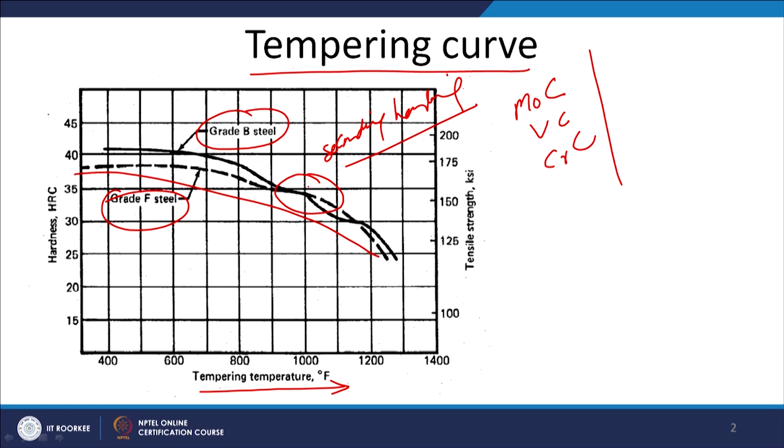Since these elements are already present in both these steels, there is one more aspect: the drop in hardness of the F grade steel is faster than the B grade steels, while the secondary hardening behavior is the same in both categories of steels.

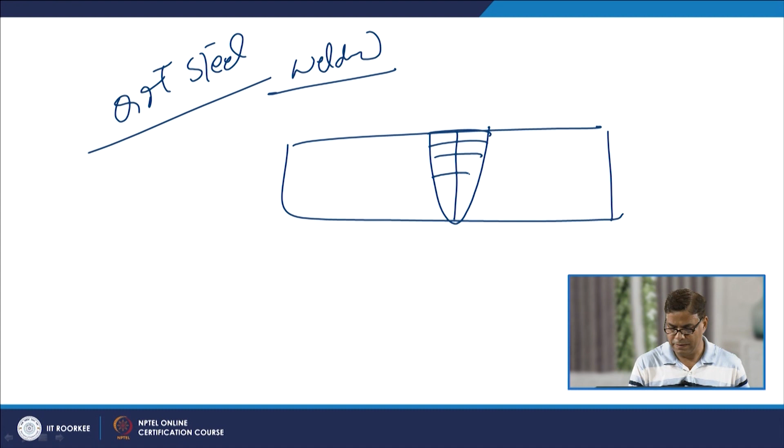Now, we have seen that when Q&T steels are welded, the weld metal as well as the heat affected zone will be experiencing different weld thermal cycles in different zones, and the kind of cooling rate experienced in these cases is found sufficient for the formation of martensite as well as upper bainite, sometimes lower bainite, and ferrite.

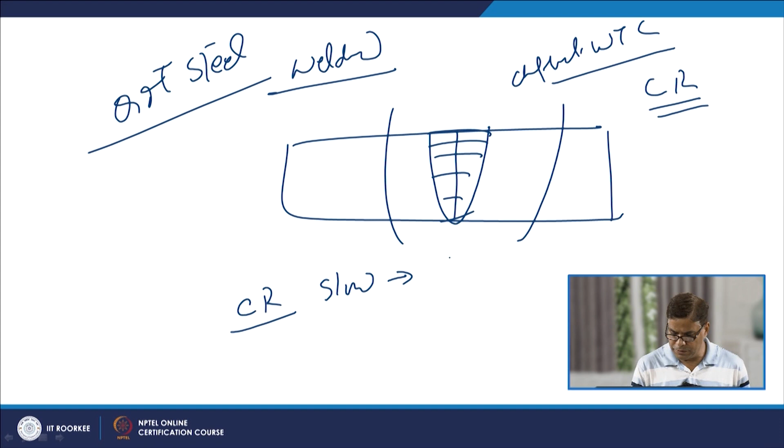But what we need to consider is, if the cooling rate is unfavorable, that is very slow, then it will lead to the formation of ferrite and upper bainite only, which lowers the mechanical properties significantly. So there is a deterioration in mechanical properties in terms of notch toughness and yield strength.

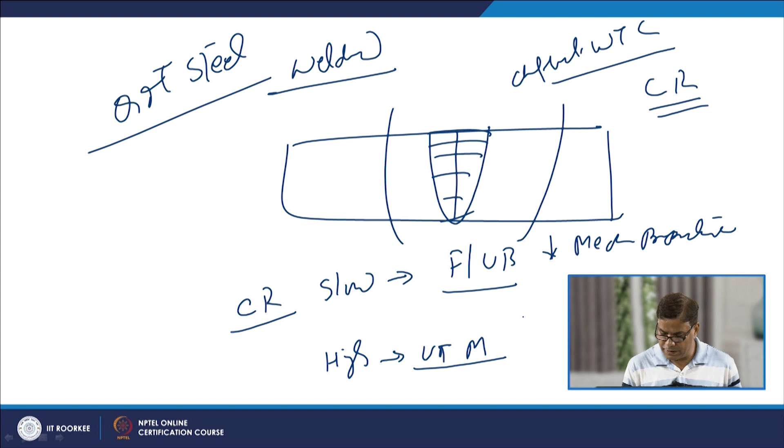When the cooling rate is extremely high, it will lead to the formation of untempered martensite. The development of residual stresses in combination with the formation of untempered martensite will increase the cracking tendency, which defeats the purpose, as the weld joint is then being made with a defect.

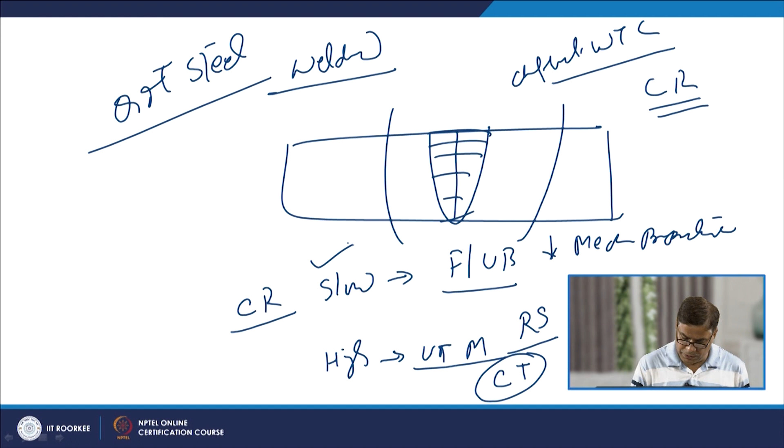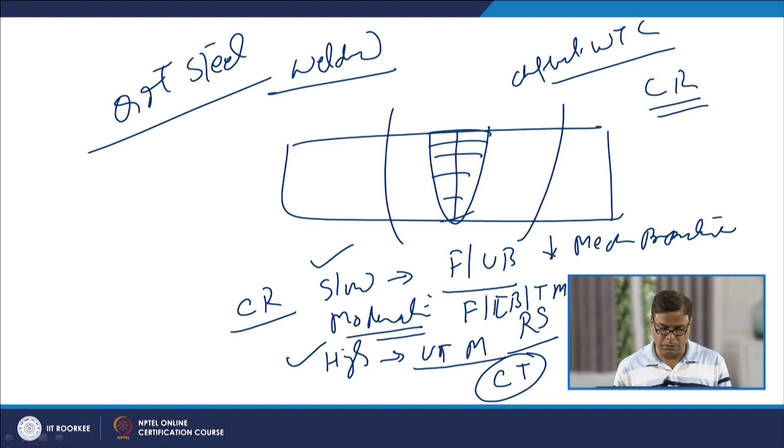So neither too high nor too low a cooling rate is needed during welding, and that is why moderate cooling rates need to be used, so that we get ferrite, bainite, lower bainite, and maybe auto-tempered martensite, giving a reasonable combination of yield strength and toughness, while unnecessary residual stresses are not developed, reducing cracking tendency and embrittlement tendency.

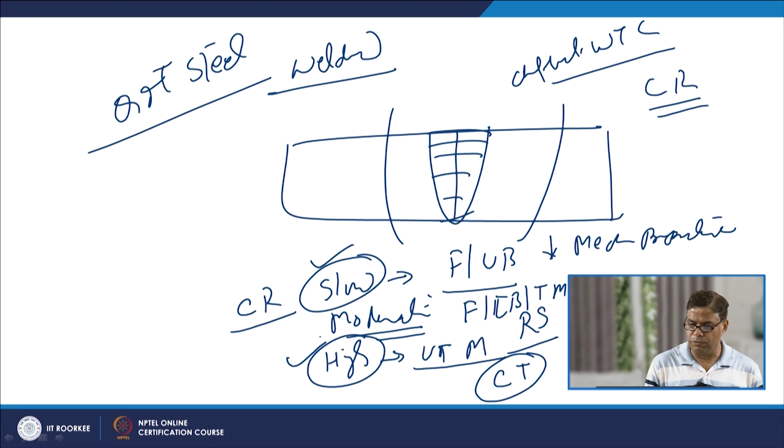So what can we do for this purpose? We have to avoid excessively high preheat. Preheating is needed, so an optimum preheat is to be used. If the preheating temperature and interpass temperature during welding of Q&T steels is too low, this will lead to a high cooling rate, which may increase the tendency for cracking due to the formation of untempered martensite.

On the other hand, if the preheating temperature is very high, this will lead to a very low cooling rate, and a low cooling rate again will lead to the formation of ferrite and upper bainite, which deteriorate the mechanical properties in terms of reduced notch toughness and yield strength.

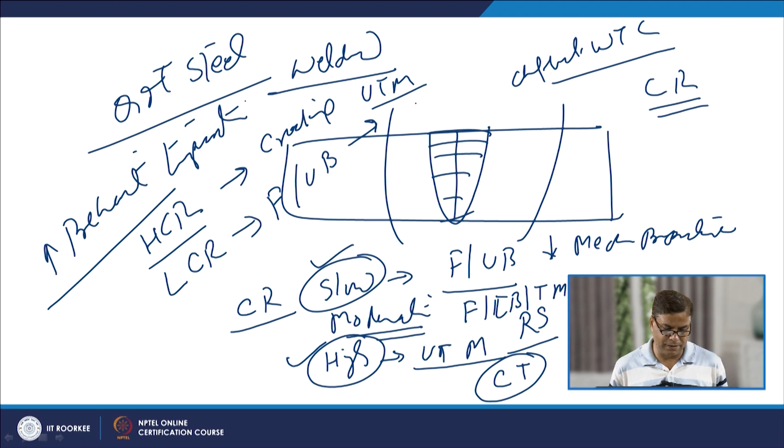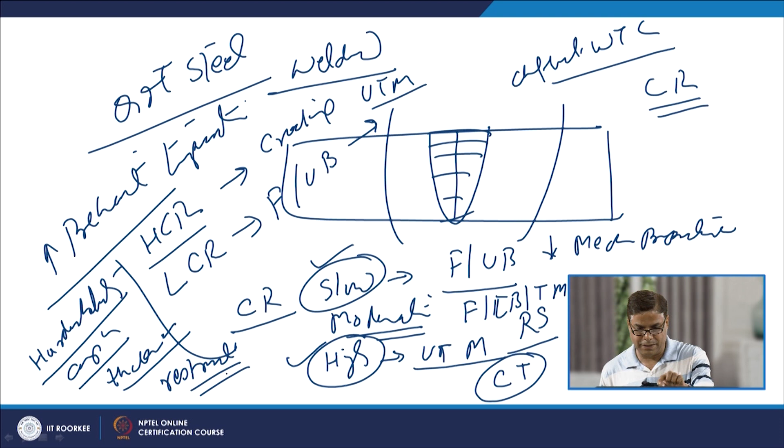So an optimum preheat temperature is to be used, carefully controlled in light of the hardenability as dictated by the composition of the steel, the thickness of the plate being welded, and the kind of restraint conditions being used, so that unnecessary cracking tendency can be reduced and the required set of properties in the weld joint can be realized.

Therefore, different values of preheat are used. Too high a preheat temperature, say 500 Fahrenheit, will lower the cooling rate, leading to the formation of ferrite, upper bainite, and maybe high carbon martensite. On the other hand, say 200 Fahrenheit will lead to a reasonable cooling rate and a good combination of ferrite, lower bainite, and maybe tempered martensite, giving much better toughness compared to when a very high preheat temperature is used.

So if we see this kind of comparison, the way by which the preheat temperature affects the toughness in terms of the energy absorbed.

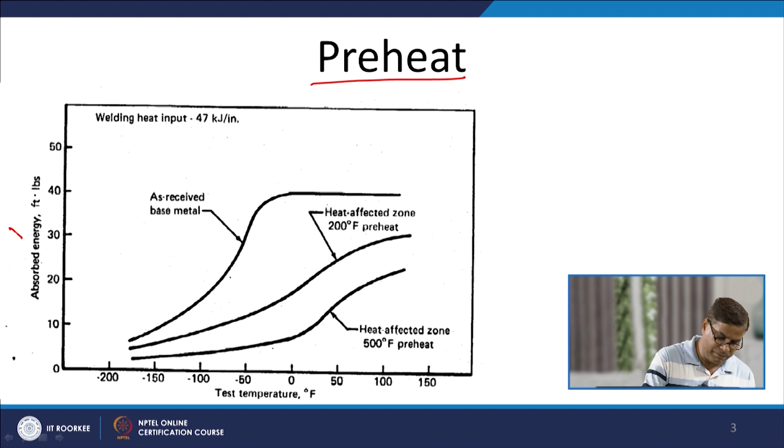This is basically indicating the notch toughness of the Q&T steel weld joints, the base metal toughness behavior as a function of the test temperature. This is the variation in toughness as a function of temperature.

If we take any temperature of the impact test, the base metal will be offering very high energy absorbed, high toughness, while the heat affected zone exposed to preheating of 200 Fahrenheit offers somewhat better impact resistance in terms of energy absorbed as compared to the case when a preheat of 500 Fahrenheit is used.

So what we can see here in all cases, there is a drop in the energy absorbed with the reduction in temperature, but this kind of drop is more severe when the preheat temperature is high, especially with regard to the impact resistance of the heat affected zone.

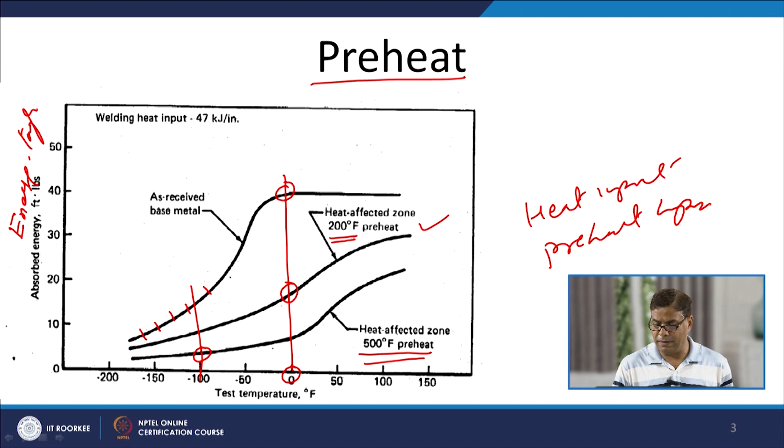So many times the heat input during the welding and the preheat temperatures are identified considering the toughness or notch toughness of the weld as well as the heat affected zone.

So the preheat temperature and the heat input are identified or established during the welding procedure specification, that means the heat input and the preheat temperatures are established in such a way that the weld joint in the heat affected zone and in the weld metal is having the minimum required toughness for a given application.

This can vary, it may be in terms of 30 units, or it may be 46 units or 64 units. So as per the application, the minimum required toughness can vary or change significantly. Accordingly, the heat input for a given welding process and the preheat temperatures need to be identified.

So higher preheat temperatures are not good, especially with regard to the impact resistance of the heat affected zone and the weld metal.

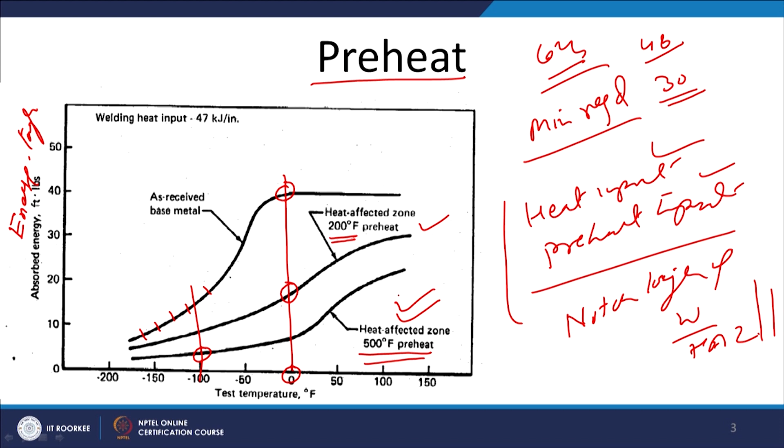Now we will see. Keeping in mind the thickness of the plate, which determines the rate at which heat is being extracted from the weld as well as the heat affected zone, so the thickness and the composition—different steels having different alloying concentrations—will be affecting the carbon equivalent.

So the conditions under which a particular kind of phase transformation takes place will also be changing, and therefore we find that the minimum preheat or interpass temperatures are found to vary significantly with the change of thickness of the plate which is to be welded.

The most common series of Q&T steel is A514 and A517. We can notice that with the increase in thickness of the plate to be welded, there is a continuous increase in the temperature which is to be used for the preheat.

And likewise for different steels there are different values of the minimum preheat temperature, which means these preheat temperatures need to be established in light of the application for a given thickness and a given type of steel, so that the preheat temperature and heat input combination offer us the required cooling rate, so that we have the desired set of microstructural features to obtain the required combination of mechanical properties in terms of yield strength and toughness or notch toughness.

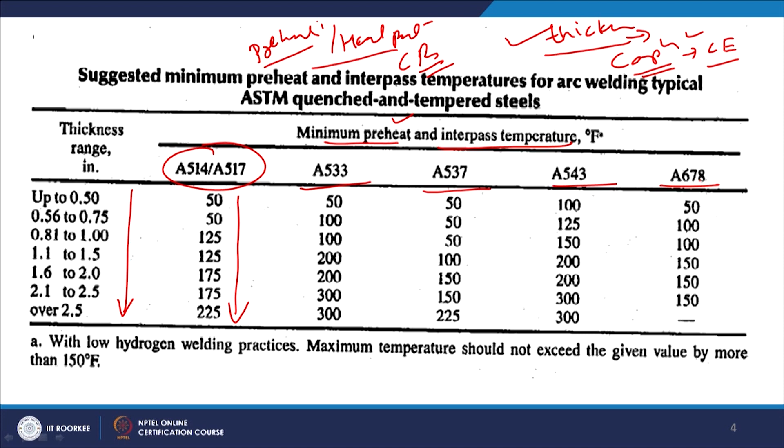So these are the preheat and interpass temperatures for the most commonly used Q&T steels, and in the next slide we have a few more preheat and interpass temperatures for HY80, HY100 and HY130 steels.

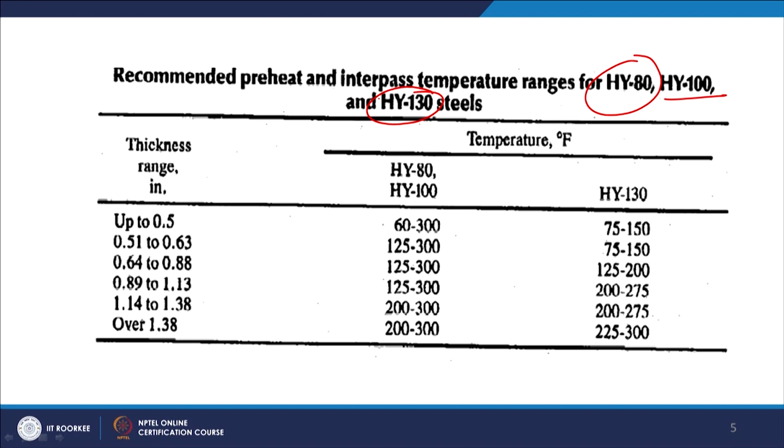And what we notice is that in this case also, with the increase in thickness of the plate, the required preheat temperature is also increased.

So almost similar preheat temperatures are there for HY80 and HY100, like for up to 0.5 inch it is 60 to 300 Fahrenheit, then 125 to 300.

So depending upon the thickness and the welding process, the kind of temperatures used have been mentioned here, and what it shows is that the minimum preheat and interpass temperatures will be increasing with the increase in thickness of the plate, while higher preheat and higher interpass temperatures are used for HY130.

It will be offering us much higher yield strength as compared to that of HY80 and HY100 type of steel. So a proper combination of the preheat and the heat input is needed.

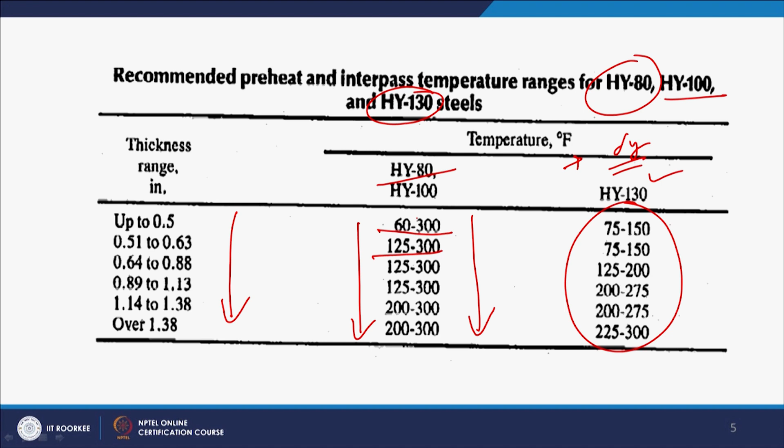Now we know that for welding or for fusion welding, heat is applied at the faying surfaces using a suitable heat source, which may be in the form of gas flame, arc, radiations like laser and electron beam, or it may be plasma. So a suitable heat source is used to apply the heat.

Since the energy density associated with each of the welding processes is different, the amount of heat to be supplied by these processes for bringing the faying surfaces of the plates to be welded will also be different.

Low energy density processes like gas welding require more heat to be supplied. So the fused zone size is more, heat affected zone size is more, and because of the high heat input we get lower cooling rates.

On the other hand, laser beam and electron beam welding processes offer very high energy density. So very less heat is required to bring the surfaces to the molten state, and a very limited heat affected zone is formed due to the less heat supply. We know cooling rate and heat input are inversely related, so lower heat input leads to higher cooling rate. Cooling rate and heat input are very closely related.

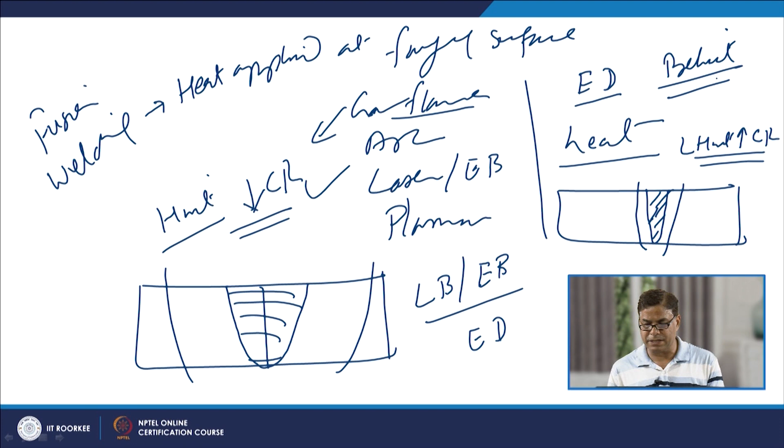Most common arc welding processes can be used for welding of Q&T steels, like SMAW, GMAW, GTAW, SAW, PAW. All these can be used for welding of steels having strengths from 50 to 100 KSI. But when the steel strength is greater than 100 KSI, we would like to use good quality welding processes that offer lesser heat input, so that the heat affected zone being formed is limited.

At the same time, the oxygen and nitrogen concentration in the weld is also less. Proper protection of shielding gases in case of GMAW, GTAW and plasma arc welding helps us develop good quality weld joints with less heat input, and the gases present in form of oxygen and nitrogen in the weld metal are also reduced.

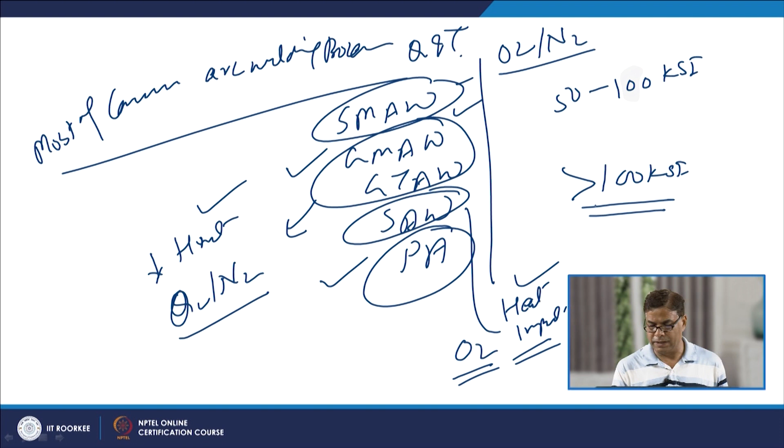Likewise, SAW also offers higher concentration of oxygen, and the heat input provided by SAW is also on the higher side. So it results in weld discontinuities due to oxygen present or flux inclusions, or wider heat affected zone due to higher heat input. So we prefer to weld high yield strength Q&T steels by GMAW, GTAW and the PAW processes.

We can use laser beam welding and electron beam welding for autogenous, meaning direct welding with no filler, up to 0.5 inch thickness of the Q&T steels. Since both these processes have very high energy density, they supply very less heat for realizing fusion of the surfaces to develop the joint.

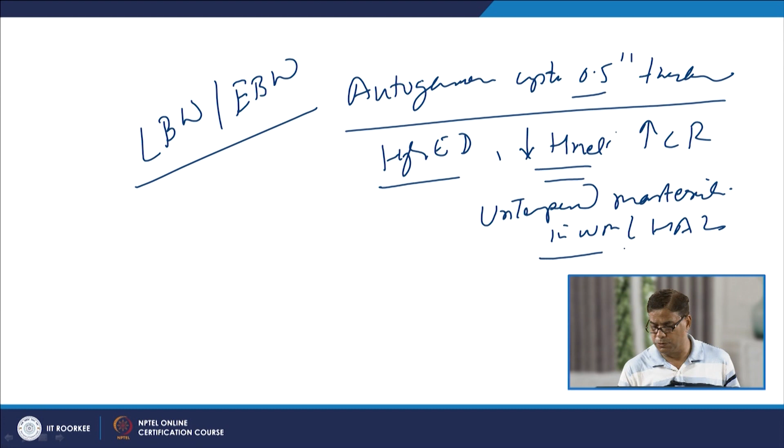Cooling rate is extremely high, and because of the high cooling rate, mostly with these processes we get untempered martensite both in the weld metal as well as heat affected zone. So we need to be careful about the embrittlement associated with the untempered martensite.

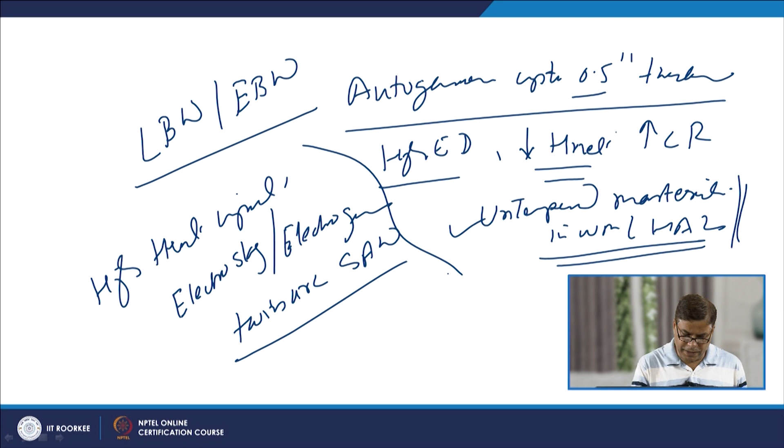But if we use very high heat input processes like electro slag and electro gas welding, or twin arc SAW process, then very high heat input will lead to a very wide heat affected zone, and unfavorable structure both in the weld and heat affected zone, which may be in form of ferrite, upper bainite, or very high carbon martensite.

And since the steel is the Q&T steel, over tempering of the heat affected zone is also caused by the welding processes which are of high heat input.

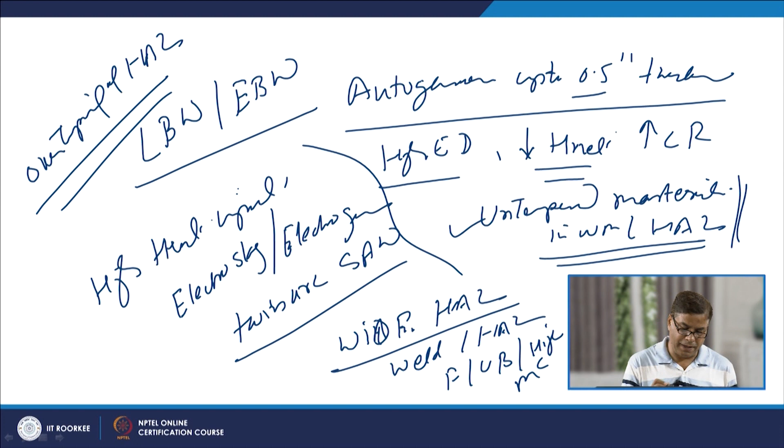So in order to overcome the issues related with weld joints made using high heat input processes, like wide heat affected zone, upper bainite, ferrite, and high carbon martensite, or even over tempering of the HAZ, it is required that the entire weld joint is given complete heat treatment again.

What does it involve? Austenitizing of the weldment, followed by quenching, then tempering, so that the properties in the base, in the weld, as well as heat affected zone can be homogenized and the properties can be restored.

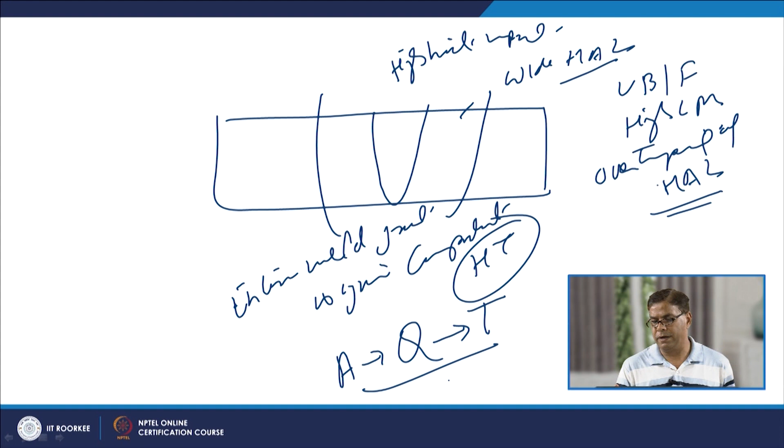So the adverse effects related with the high heat input associated with electro slag, electro gas, and submerged arc welding processes can be reduced. The complete heat treatment of such weld joints is needed, so that especially the notch toughness can be restored, apart from maintaining the required combination of properties.

Otherwise, in most arc welding processes, the weld thermal cycle realized in the weld as well as heat affected zone is such that the cooling rate is high enough to form ferrite, lower bainite, and tempered or auto-tempered martensite in the weld as well as heat affected zone of the Q&T steel weldments, and that is why the mechanical properties of the weld and HAZ of Q&T steels are similar to that of the base metal.

Now, we will see the heat input related aspect: heat input, the preheat temperature, and the thickness of the plate. These are the three aspects which are seen together, because a combination of these three will be determining the rate at which heat is extracted from the weld as well as the heat affected zone.

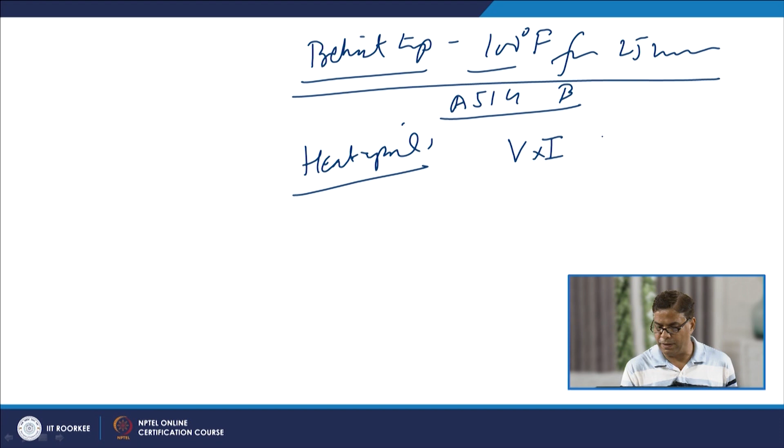Then we get the net heat input in joule per millimeter; if we want, normally heat input is expressed in kilojoule per millimeter. So we will be dividing V into I by welding speed, divided by 1000.

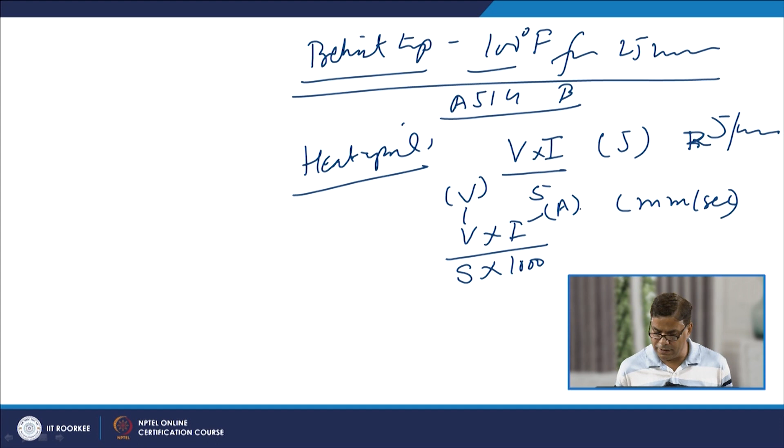This gives us the voltage, V is the arc voltage, I is the current in ampere, and S is the welding speed in millimeter per second. If it is in millimeter per minute, then we need to multiply by 60.

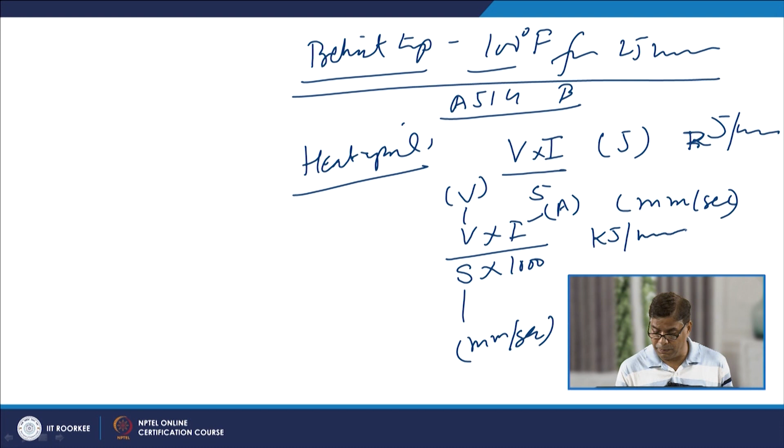This is what gives us kilojoule per millimeter. So, for a given welding process, whether it is SMAW, SAW, PAW, GMAW, or GTAW, whatever the process is, we will be using a particular value of current and voltage, and the arc will be traveling at a particular speed.

So, for those various combinations, we need to see that our kilojoule per millimeter net heat input does not cross the specified value. So, through the welding procedure specification, for a given preheat during welding of a plate of given thickness and given composition, we try to identify the heat input so that we are able to achieve the required notch toughness.

Most heat inputs are given with reference to the notch toughness value, such that the combination of welding parameters and preheat temperature for a given thickness of plate of a given composition will offer this much minimum notch toughness, because most of these steels experience a drop in toughness during welding, which is why notch toughness is considered an important criterion.

There is another set of steels in the Q&T category where a greater drop in yield strength takes place. In that case, yield strength of the weld joint is taken as the qualifying criteria for determining preheat temperature, heat input, and for a given thickness of plate of the given steel.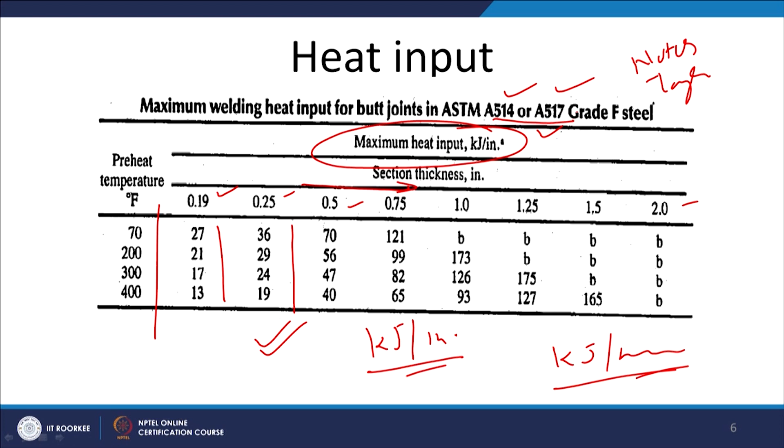So we can obtain the value in kilojoule per millimeter, which is most commonly used, by dividing these values by 25. This gives us the maximum heat input which will give us the acceptable range of notch toughness. This is the kind of heat input data which can be used as a guideline for welding of A514 and A517 steel, and similarly for maximum heat input for welding of HY80 and HY100 steel.

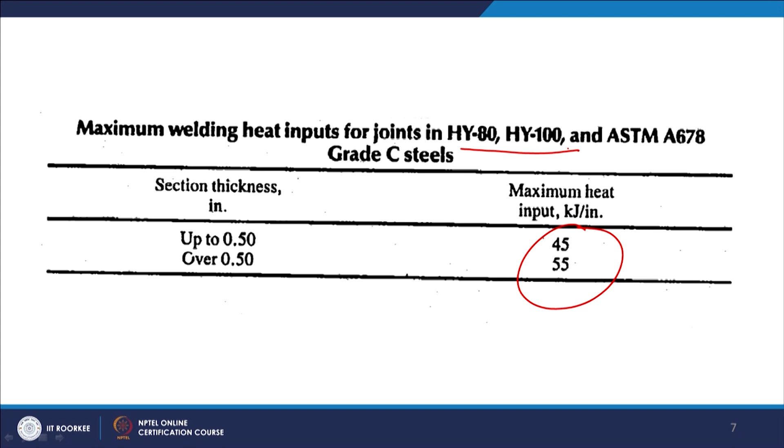Now, I will summarize this presentation. In this presentation, I have talked about the way welding processes affect the weld joint characteristics of Q&T steels, and how we should select the preheat temperature for developing weld joints of Q&T steels, so that we can realize the required combination of properties. Thank you for your attention.